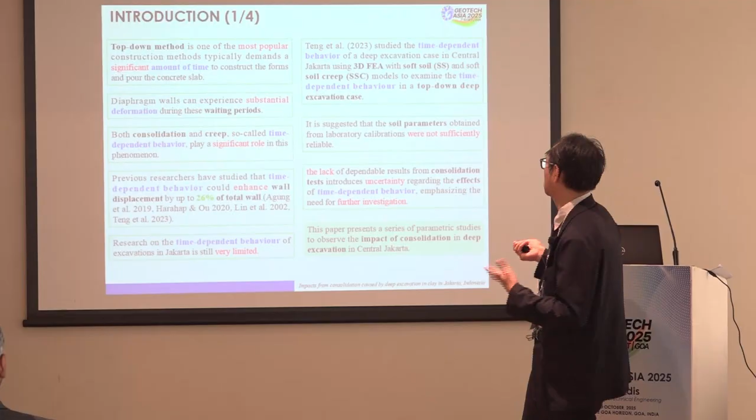And lack of dependable results from the consolidation test introduced major uncertainty, because we don't have reliable SI data, so there are uncertainties for the time-dependent effect. That's the background for why we want to do this study and try to get some conclusions.

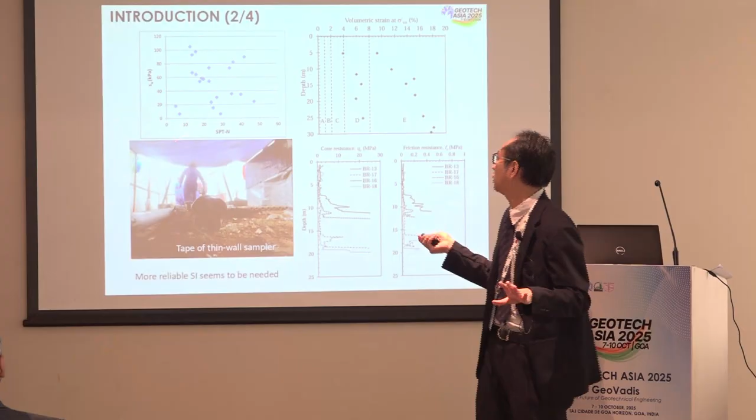Now talking about the uncertainty of the soils which we have here. This is a figure we have, because we use the underground work in Jakarta MRT excavation as a background. As you can see, these axes show the undrained strength, and these axes show the SPT-N value. You can see the data is quite scattered there.

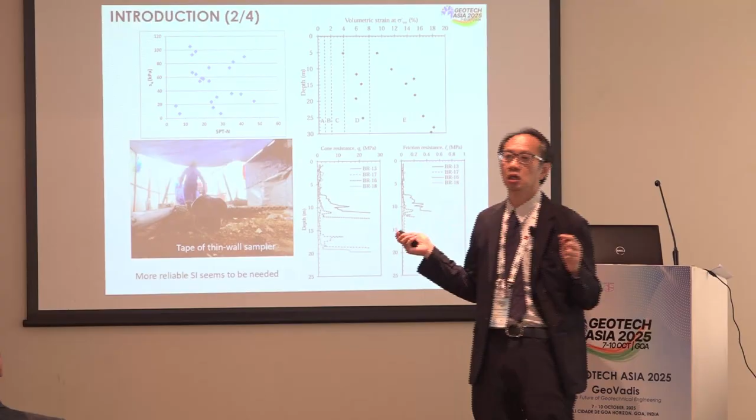So we even cannot find a kind of relationship between the Su and the SPT-N value. We tried to explore why, because supposedly, if you understand from the statement made by Professor Skempton, it should have one. So we look at the data we have, the so-called SQD, sample quality designation, recommended by Professor Tanaka and Professor Park, to evaluate sample quality.

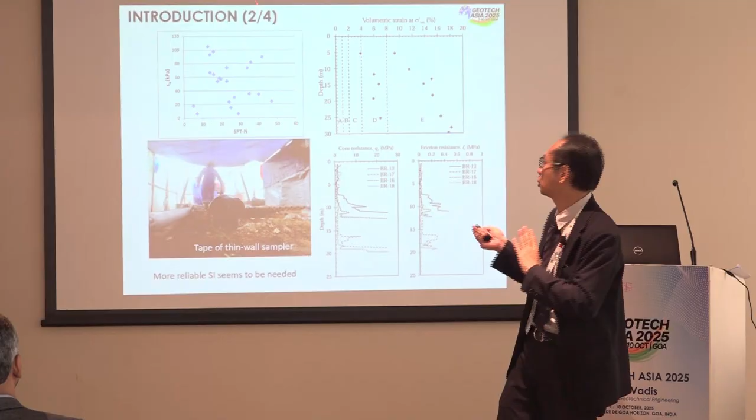In fact, by the volumetric strain which you have from the sample, you understand most of the samples we have are in level C, D, E. But actually, Professor Tanaka and Park say if you want to have an undisturbed sample, you need to keep the level in A and B. So that's one of the reasons why I say maybe our test data is not that reliable.

And again, if you look at this sampler, a thin wall sampler, the tip here should be rounded, but as you can see, that's totally twisted. And they used that to do the sampling work. So from these two, we understand our samples are kind of disturbed.

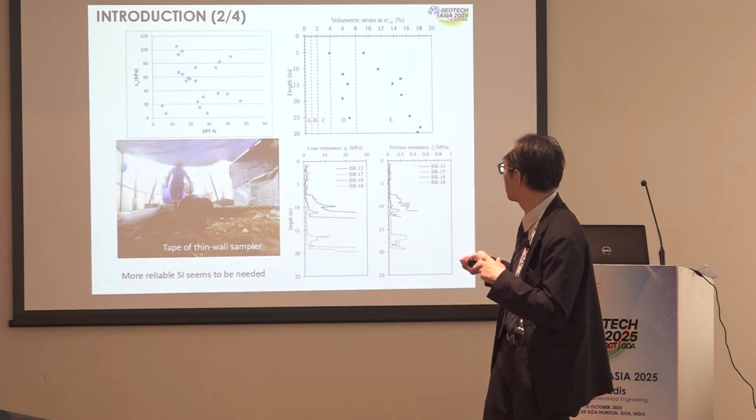So we also look at the CPT results and understand that deeper than maybe 8 meters below surface ground level, the soil is actually quite stiff. This gives us a kind of confidence that we have to do more tests together with CPT to get more reliable test data.

That's what the site condition is. And a very special thing is, even though that's in Jakarta, funded by the Japanese government, we, as a company of engineers from Taiwan, had a chance to be involved in this project. That's the reason why when we had the first tunnel breakthrough, we had our national flag there.

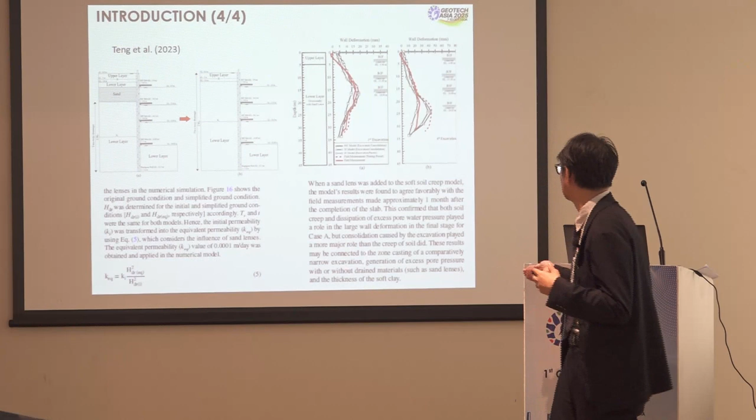Okay, here comes the last page of my introduction. So that's some conclusions we got here, because we do find some sand layers between very thick clay. That's the reason why we needed to evaluate how consolidation and even creep affect the deformations. And in fact, we understand from the simulation that consolidation is quite an important factor for deep excavation in Jakarta using the top-down method.

But as I just mentioned, we do have some uncertainties about the time-dependent soil parameters, like the compression index, or the swelling index, or the creep index, and even the construction time of the slab. So we want to explore those parameters individually, one by one.

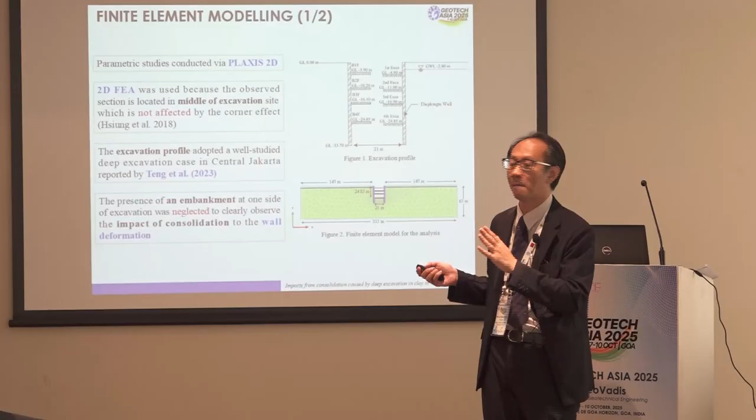So here, talking about the FE models we have. We use Plaxis software and do the two-dimensional analysis, and that's the case. That's a profile, the excavation profile together with the soil we have here, and as you can see, that's excavation down to like 24 something below surface level, but the wall is actually not that deep.

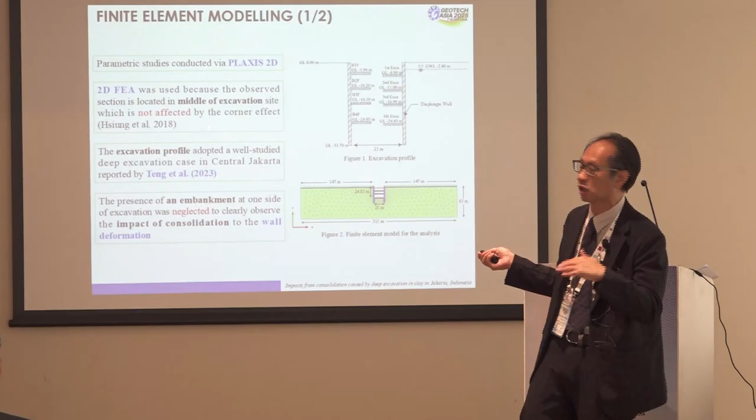It's up to 33 meters, because as I just mentioned, going down further to 8 meters below surface level, the soil is quite stiff. And we use the same excavation profile as in 2023, so that's the reason why I say this is a follow-up study.

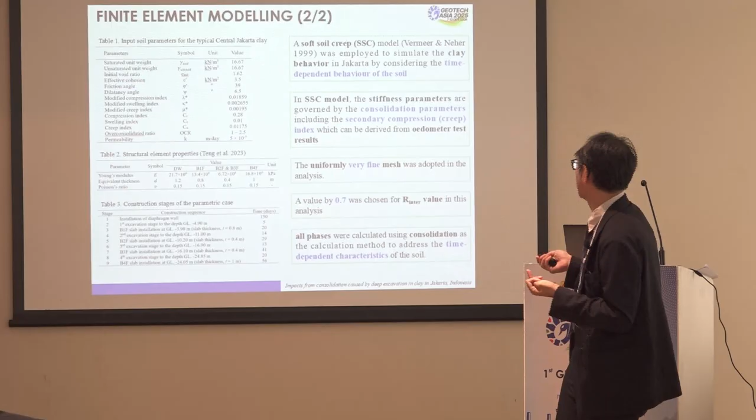Very quickly, let me further explain the FE models which we have. We again use soft soil creep models. Here lists all the parameters used. The consolidation parameters we include are the compression index, the swelling index, and the creep index. We use a uniform, very fine mesh in our analysis, and a value of 0.7 for the R-inter. This is the construction phase assumed in our analysis, and these are the structural parameters used for the retaining wall and also for the RC slab in our model.

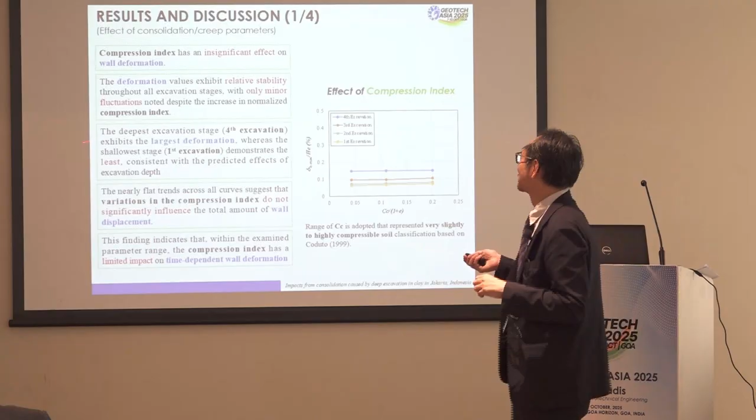Now we want to explore the parameters one by one. Sorry, how much time do I have now? Another 5 minutes, okay, so I have to be quick.

So the first one we evaluate is the so-called compression index. If you look at the result here, this is a ratio showing the maximum wall deflection divided by H, and here we change the compression index. As you can see, the line is quite straight, quite flat, meaning that changing the compression index may not give a very significant change in wall deformations. So even though we don't have confidence about the compression index, it should be fine because it doesn't change a lot. That's the first conclusion from the compression index.

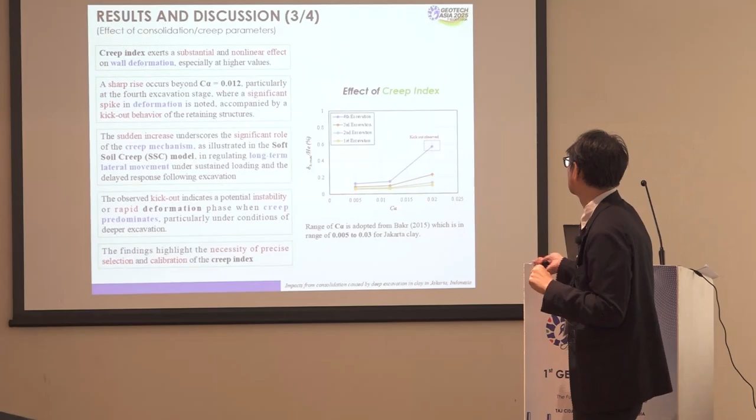The last one is about the creep index. Again, we put it in the figures here, the same ratio, the maximum wall displacement divided by the excavation, against the creep index. If you have a creep index less than 0.012, there's no significant change. But once you have a value more than that, it will affect more. So for this index, I think we will need more exploration, to confirm what the value will be, by laboratory testing to understand what the creep index will be.

And the last one is the construction time. Our understanding is that if the construction time is longer, you are going to have more displacement rather than the original one. So construction time really is an issue.

So here I come to the conclusion. Very quickly, as I said, the compression index doesn't significantly affect the result, but the swelling index does affect a lot. So you really will have to consider the real swelling index to get a more reliable one. And the creep index, as I mentioned, as long as you have a value more than 0.012, it is going to affect more. So more reliable testing about the creep has to be done, and also the construction time is also an issue affecting the maximum wall displacement. Okay, that's the end of my presentation. Thank you very much.

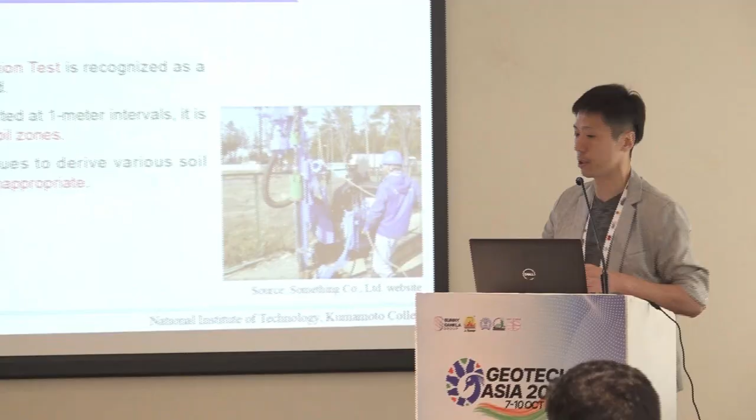In Japan, the standard penetration test is recognized as the representative investigation method. However, since the test is conducted at 1 meter intervals, it is difficult to identify localized weak soil zones. Furthermore, relying on N values to derive various soil properties for structural design is inappropriate.

So this study aimed to identify the bearing stratum prior to bridge foundation construction using N-values, X-ray CT analysis of boring cores, and density log. X-ray CT analysis was used to estimate core density, and the accuracy of the density values was assessed with density log results. Based on density, we attempt to evaluate the bearing stratum, and the results are reported here.

Next, survey site and survey method. This study area includes a river bridge located within Kumamoto Prefecture, Japan, and the stratigraphic composition is shown in this table. The fourth layer is the bearing stratum, consisting of a sandy gravel layer with cobbles, showing N values greater than 50. However, in the upper part, a slightly loose gravel layer is distributed. Therefore, careful attention is required to accurately identify the bearing strata.

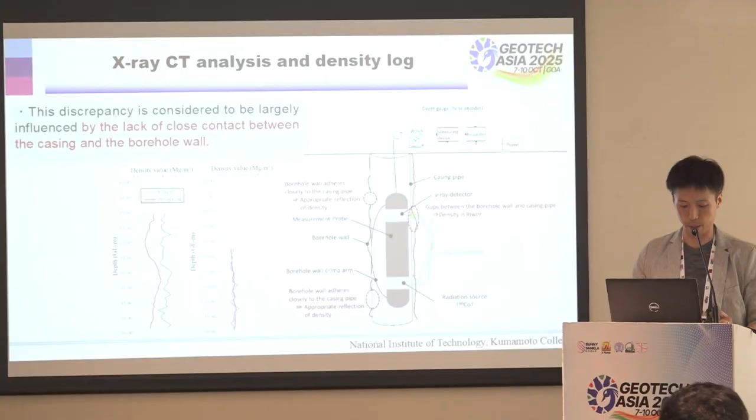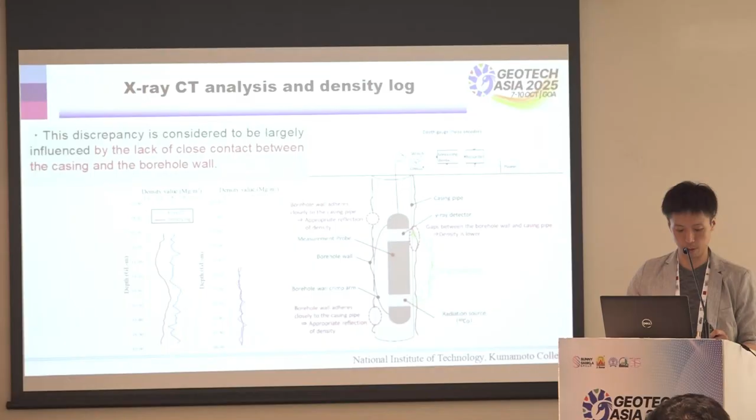We have confirmed from observation of the borehole core that it is a clay layer, so of course no gravel. It is considered that there was little to no gap between the casing pipe and the borehole wall. As a result, the correlation with density exhibits a clear trend. This can also be considered supporting data for the hypothesis that the density discrepancy is due to a lack of close contact between the casing perimeter and the borehole.

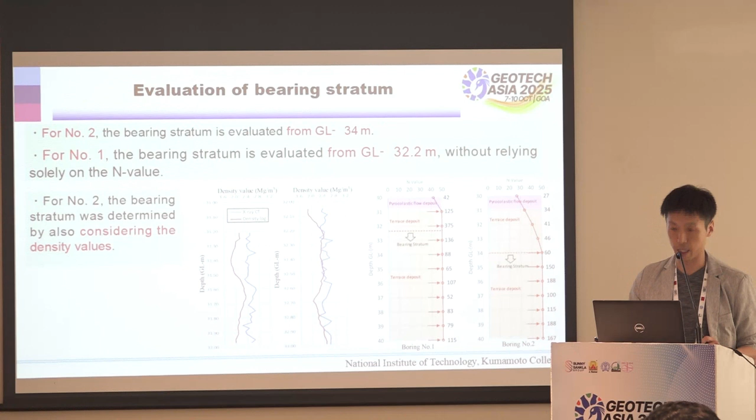Next, this figure shows N values at two representative locations and the evaluation of the bearing stratum. For number 2, since the N value remains below 50 even within the terrace deposit layer, the bearing stratum is evaluated from 34 meters. For number 1, the N value reaches 50 immediately upon entering the terrace deposit layer, indicating that based solely on the N value, the upper part of the terrace deposit layer can be considered suitable as the bearing stratum.

However, number 1 corresponds to the location where the density values were previously shown, and the upper part above the measured density may consist of small gravel or looser matrix. Therefore, since the upper part may be loose due to redeposition, the bearing stratum is evaluated at depths near 32.2 meters, where the discrepancy between the two density values becomes very minimal.

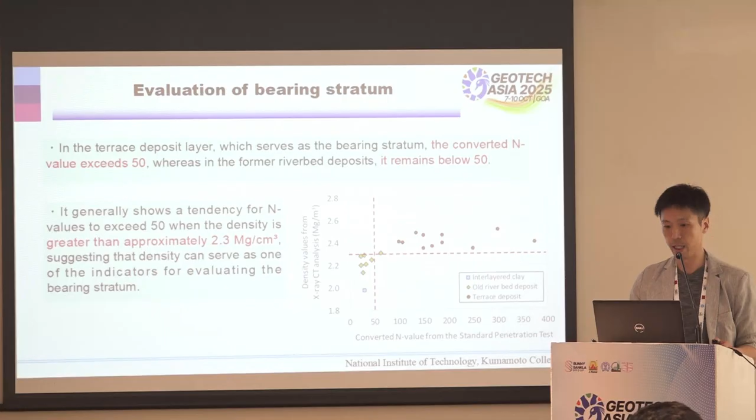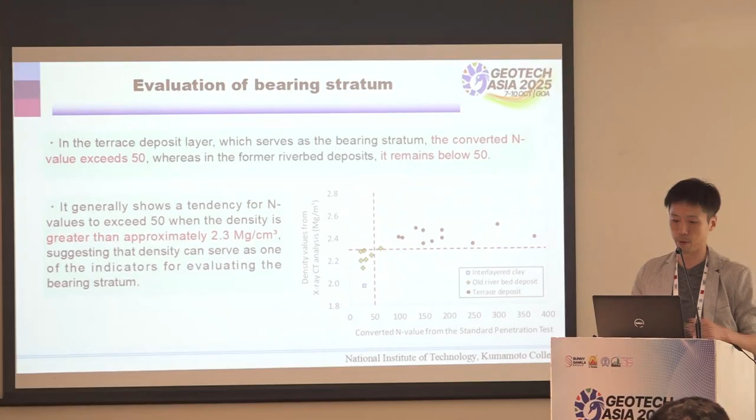Next, I will discuss the correlation between the density values obtained from X-ray CT analysis and the converted N values. In the terrace deposit layer, which serves as the bearing stratum, the converted N value exceeds 50, whereas in the former riverbed deposits it remains below 50. It generally shows a tendency for N values to exceed 50 when the density is greater than approximately 2.3, suggesting that density can serve as one of the indicators for evaluating the bearing stratum.

In conclusion, we conducted the bearing stratum evaluation not only based on N value, but also using X-ray CT analysis and density log, with the aim of more reliably identifying the bearing stratum. As a result, these conclusions were obtained.

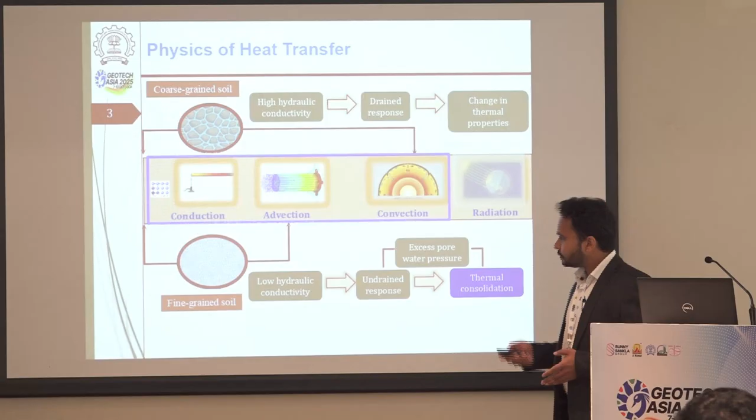This whole process has 3 major components when it comes to geotechnical engineering: thermal, hydraulic, and mechanical. When we talk about deep foundations where temperature is involved, we have to investigate this THM, famously called thermo-hydromechanical coupling, that influences pile capacity and soil-pile interaction on the surface. But for this presentation, I will mostly focus on the thermo-hydro coupling, how temperature and the hydraulic component are going to influence the process.

If we talk a little bit about the mathematics here, we see the standard heat transfer equation in a porous media, where we have a heat storage component, a fluid flow component, and how heat transfer happens because of thermal conductivity. And this is a Brinkman equation. I am not going into detail of this equation, but how these 2 equations are coupled to affect both thermal and hydraulic processes.

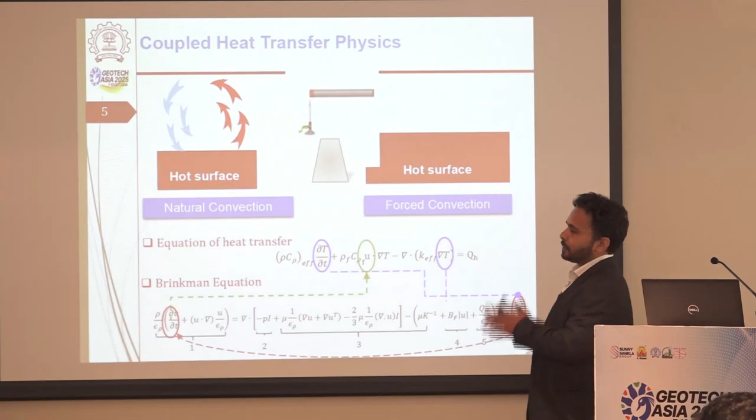If we look here, there is a time dependent change in temperature, dT over dt. And because we have a thermal gradient here, the density of the pore fluid changes in the medium. That density driven flow creates a volume force in the fluid, and that triggers a velocity. Once this velocity is triggered, it will activate this component. So by two-way coupling, heat transfer and fluid flow both influence each other, and this process becomes a highly non-linear process.

In terms of energy piles, why energy pile? Because anyway, to sustain a building structure, we are installing piles. We can install a geothermal heat exchanger in the pile and utilize this process without any additional cost of a borehole or any other medium.

When we install a geothermal pile, the geothermal heat exchangers can be of many shapes and sizes depending on the pile diameter and need. It can be a single U-loop, it can be a double U-loop, it can be multiple U-loops depending on the diameter of the pile. If it is a very big diameter like 1 meter or 2 meters, we can have 3 or 4 loops. Depending on the design, it can be coaxial as well, where you send the fluid from the center and take it from the top.

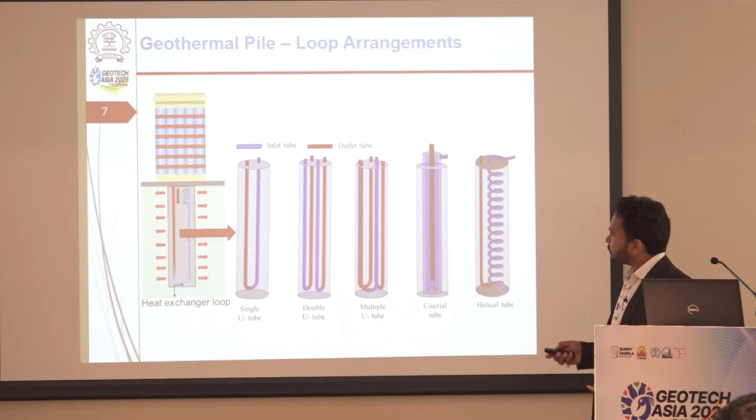For this study, we took an example of 3 piles in a group at different spacing, with a clay layer and a sand layer, the sand layer having high hydraulic conductivity. We looked at how the natural convection process affects the entire heat transfer process in this medium, using finite element software for this design.

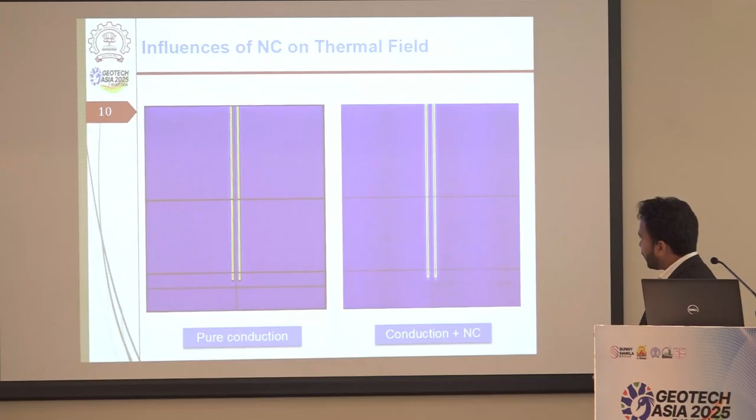In the sand layer, heat transfer happens much faster compared to the clay layer. Initially, when natural convection is not triggered, the process is almost the same in both layers, but as time progresses, the sand layer shows very high thermal expansion.

When we look at the thermal temperature contour considering only conduction, without coupling the thermomechanical and thermohydro processes (TH process), temperature is evenly distributed in both layers because we are not considering the hydraulic component.

But when we consider the hydraulic component, in the sand layer temperature is distributed very narrowly, because most of the heat is getting dissipated far away due to natural convection. In case of conduction alone, all the temperatures stay close to the pile.

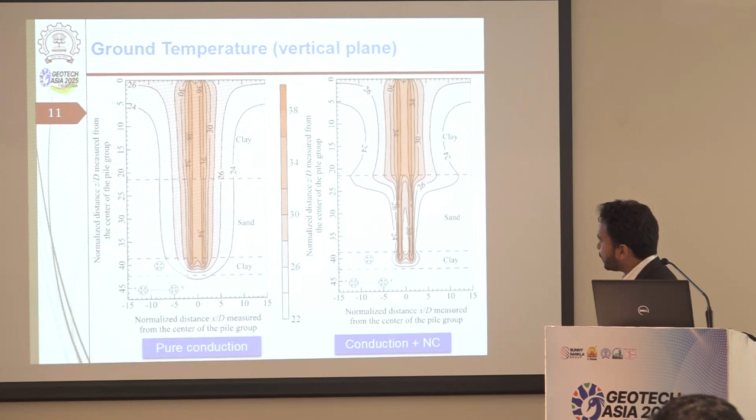We have 2 minutes, Arvind. Okay. When we investigated the heat storage capacity, we found that the coupled flow process is always able to store more energy, depending on the pile spacing.

This shows that when we model with the proper physics happening in the ground, we can extract more and more energy.

So we conclude that natural convection does influence the heat transfer process, affecting our energy extraction and injection capacity. When designing a geothermal pile, we should not design based on conduction alone, because then we assume the entire pile increases with the same temperature.

But we saw that in practice it's not happening that way. When we have a layer of coarse-grained soil with higher hydraulic conductivity, the temperature increase is less, and this temperature difference between sections of the pile will influence the pile's integrity and bearing capacity.

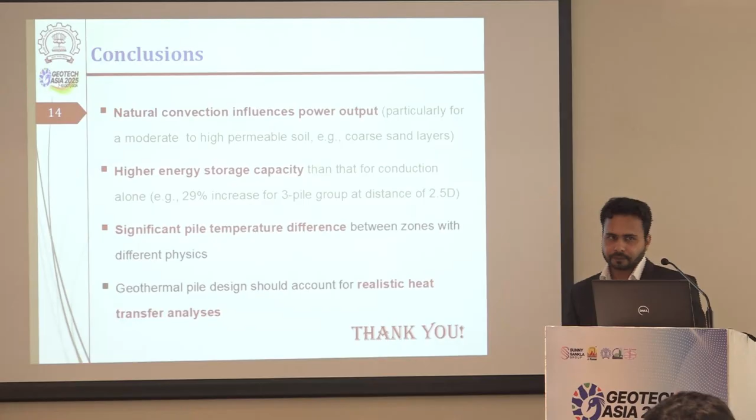What are the temperatures you are talking about here? We consider the ground temperature as 22 degrees, and the inlet temperature was 40 degrees.

It was mostly simulating the Indian condition, where we have a hot summer and we want to cool the building. We take the inlet as the high temperature from the building, and since the ground is at a lower temperature of 22 degrees, the heat we get is lower than 40, and we utilize this to cool the building. In winter it will be exactly opposite.

This is basically a numerical study, or do you have field data as well? This is the numerical study, but now where I am doing my postdoc, we are doing it in the field as well.

Thank you very much. Are we doing this in real life projects, these things, in India? Yes, we are doing it in real life. I believe we always talk with professors about why we are not doing it in India. We are doing it in Europe, China, Australia, USA, almost everywhere except India.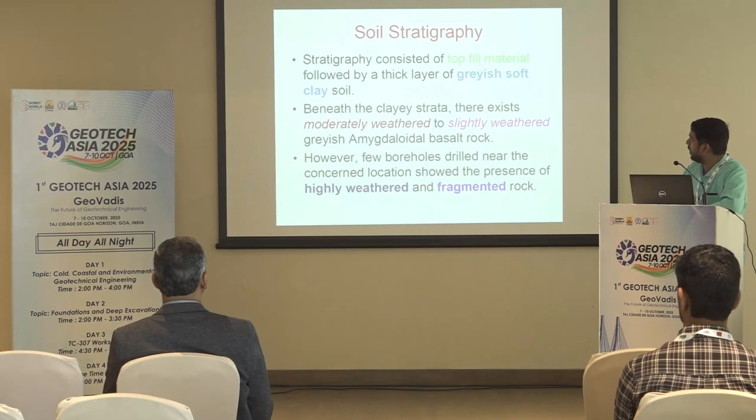It was followed by a thick layer of greyish soft clay soil. Beneath the clay strata, there existed moderately weathered to slightly weathered amygdaloidal basalt rock. However, few boreholes drilled near the concerned location showed the presence of highly weathered and fragmented rock as well.

Coming to the foundation details, the proposed foundation actually consisted of a pile group connected to a raft, which acted as the base for the slurry storage tank. Each tank was supported by a group of 97 piles in circular pattern, and diameter of these piles was 0.6 meter with a center-to-center radial spacing that varied from 1.5 to 2 meters.

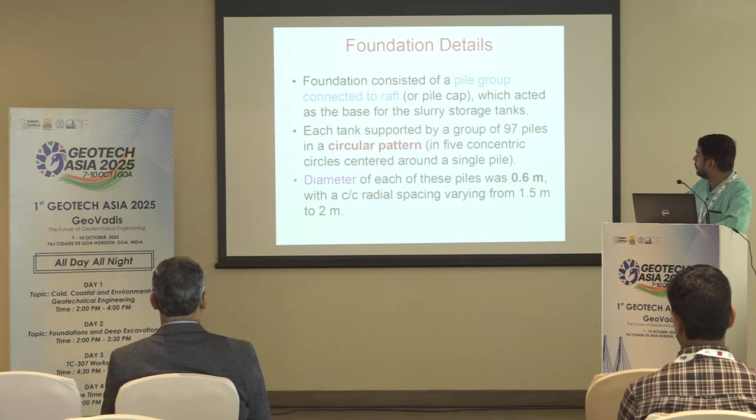So this was the arrangement of piles, the 97 piles in concentric circular pattern, and minimum spacing was around 2.5 D. The embedment length of the piles varied from 21.2 meters to 25.2 meters depending upon the availability of competent rock strata, and all the piles were socketed to a depth of about 1.2 meter, that's about 2 times the pile diameter of 0.6 meter.

Coming to the numerical investigation that was done to perform this forensic analysis, it was done in Plaxis 3D, latest version. The soil stratigraphy was divided into 3 layers: top fill material from 0 to 1.5 meter, soft clay soil from 1.5 to 22 meter, and medium gray basalt rock extended to 30 meters.

The constitutive model for the fill and rock layer was Mohr-Coulomb model, and soft soil model was used to represent the behavior of the sandwiched clay layer, which was exhibiting a high degree of compressibility. In fact, the compression index was around 2.37, and pile group was modeled using an array of elastic embedded beams. Maximum value of the skin friction resistance and base resistance has been entered as a part of embedded beam property.

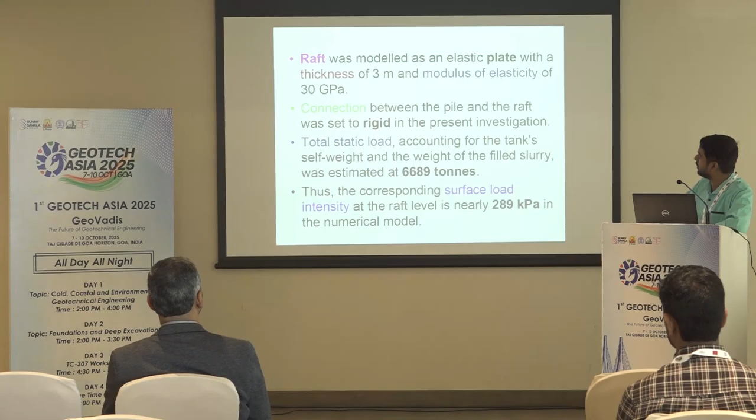Now the raft was modeled as an elastic plate with a thickness of 3 meter and modulus of elasticity of 30 gigapascal, which is a value for the concrete. Connection between the pile and the raft was set to rigid in the present investigation.

Now coming to the results and discussion, if you see the effect of rock quality condition, the average of RQD and core recovery was around 70%. Now if we calculate the ultimate bearing capacity of this rock socketed pile based on IRC 78/2014, it will come around 4,483 kilonewton.

However, in few boreholes located closer to the tank area, the rock quality designation and the core recovery values are very low. In fact, RQD plus core recovery divided by 2 will come less than 30%.

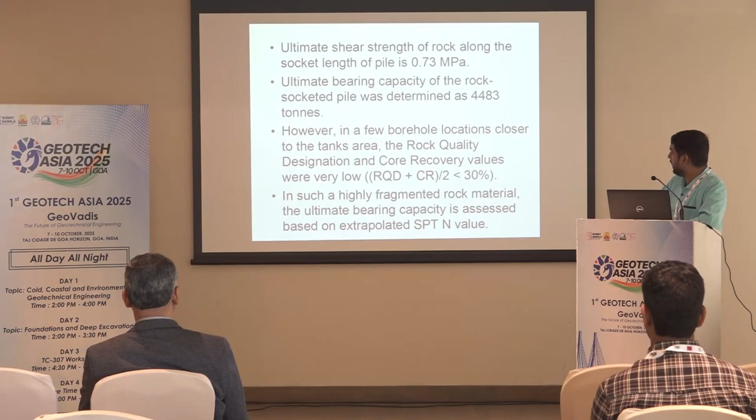Now coming to the effect of downward drag forces. For this, the numerical analysis was conducted with a consolidation calculation, where the soft layer was allowed to consolidate for a period of 365 days. Axial force at the pile tip was found to increase from 780 kilonewton to 996 kilonewton, and this would affect the factor of safety.

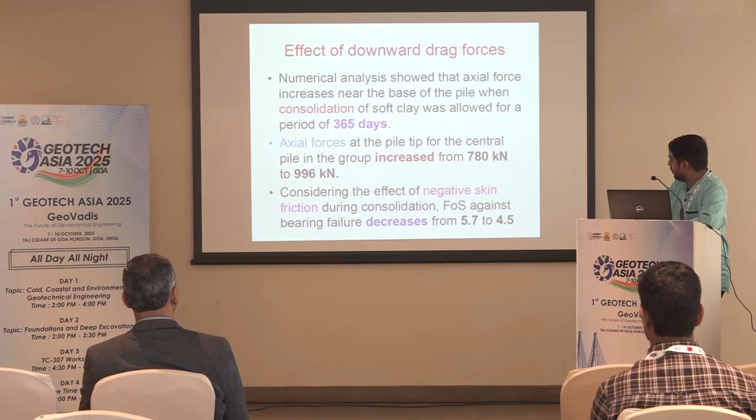The factor of safety would go down now from 5.7 to 4.5 in case there is a good quality rock. But in case the rock quality was much lesser, as RQD and core recovery by 2 is less than 30, as was the case in some boreholes, it would come as low as 1.9, considering the combined effect of downward drag and the existence of very poor rock condition.

Although the failure risk may be substantiated with a highly reduced factor of safety, it does not explain the cause of failure, because still the factor of safety is greater than 1, and the settlements were around 50 to 60 mm only. Now, another possibility could be that the pile is terminated on soft clay.

High magnitude of total and differential settlement may not occur even if the pile was terminated in very weak fragmented rock zone. In this scenario, it is suspected that the pile was terminated in a much softer material with comparatively lower stiffness and strength. Distinction between the rock and the soil at the site was just based on specific gravity. In fact, something greater than 2.7 was classified as rock. However, specific gravity is not a proper indicator of the strength.

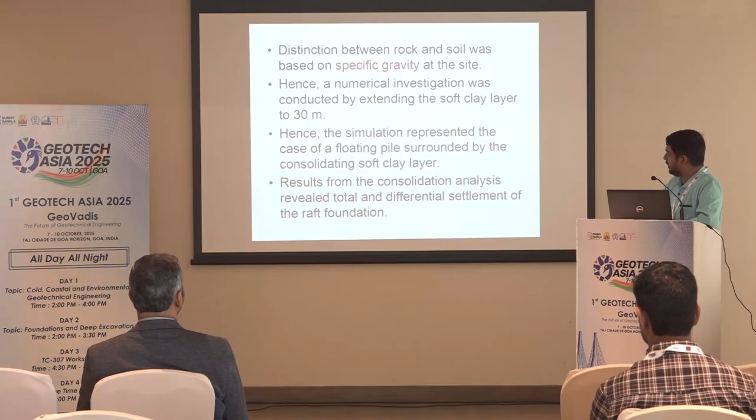Hence, a numerical investigation was conducted by extending the soft clay layer to 30 meters. The simulation represented the case of a floating pile surrounded by a consolidating soft clay layer. Results from the consolidation analysis revealed the total and differential settlement of the pile raft foundation. The maximum and minimum settlement were around 701 mm and 471 mm. This was very close to the maximum settlement observed at the site, which was around 628 mm and 734 mm.

However, the tilt obtained in the present analysis is about 1 in 80. This was much lesser than the reported value of 1 in 20 and 1 in 30. This may be attributed to the very rigid connection that was assumed in the FE model between the pile and the raft. Also, the raft-soil interaction was not modeled accurately in the analysis, so it may be concluded that there is a high probability that most of the piles are founded on soft compressible clay strata.

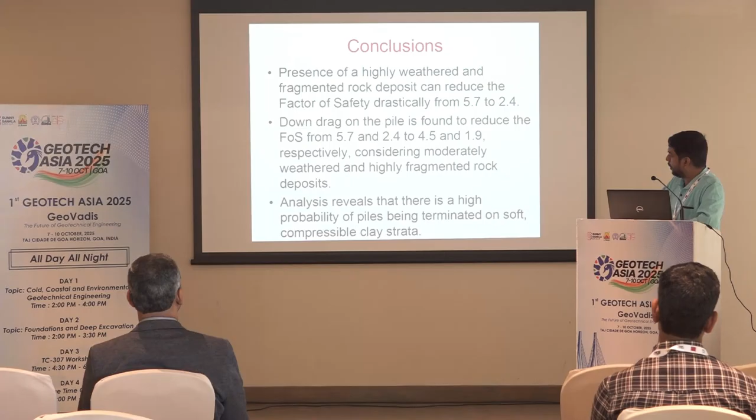Coming to the conclusions: presence of a highly weathered and fragmented rock deposit reduces the factor of safety drastically from 5.7 to 2.4, and the downward drag on the pile is found to reduce factor of safety further from 5.7 and 2.4 to 4.5 and 1.9 respectively, considering the moderately weathered and highly fragmented rock deposits. The analysis also reveals that there is a high probability of piles being terminated on soft compressible clay strata, leading to heavy settlements. That's all from me. Thank you.

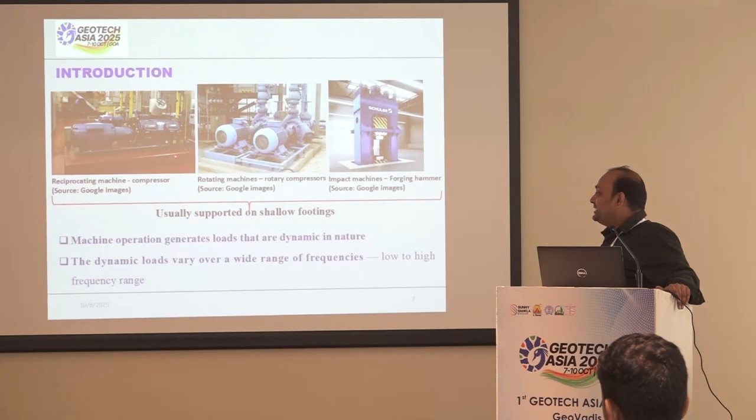So you see that you have a compressor over here, which is basically a reciprocating machine. You have a rotary machine, which is a rotary compressor, and you have an impact machine, which is a forging hammer. So all these kinds of machines need a footing or a foundation to rest on, and when these machines operate, they generate dynamic loads. These dynamic loads have a wide range of frequencies, varying from low to high.

So this particular problem that we are going to solve, or that we are going to develop, is basically for these sets of applications.

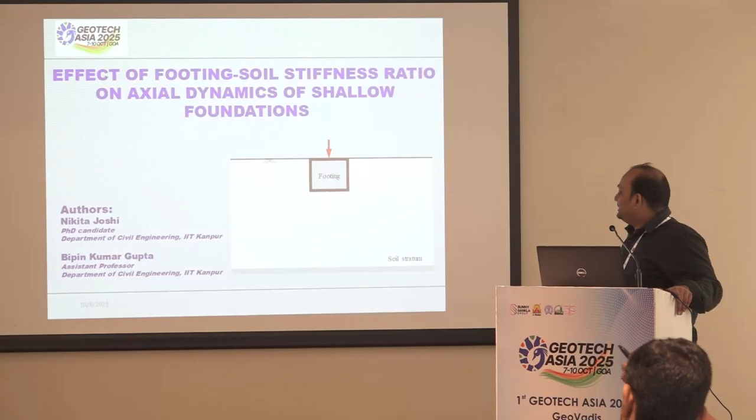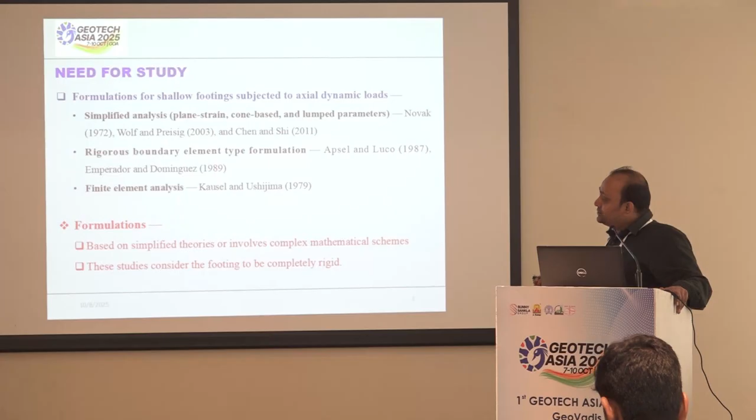So all these formulations that you see, they have certain deficiencies. Some of them are based on simplified theories, not rigorous enough. It does not incorporate three-dimensional effects, and they might be based on complex mathematical schemes. You are pretty much aware of finite element analysis - for boundary element formulations, we end up using software and all.

When we talk about foundations for these kinds of problems, there is another issue that people have not really investigated. These studies consider the footing to be completely rigid and do not incorporate the effect of stiffness of the footing. So we have developed an analysis to investigate whether the stiffness of the footing is actually necessary or not.

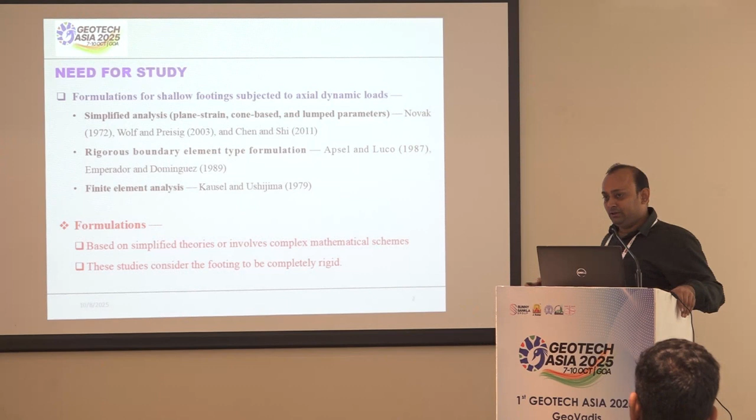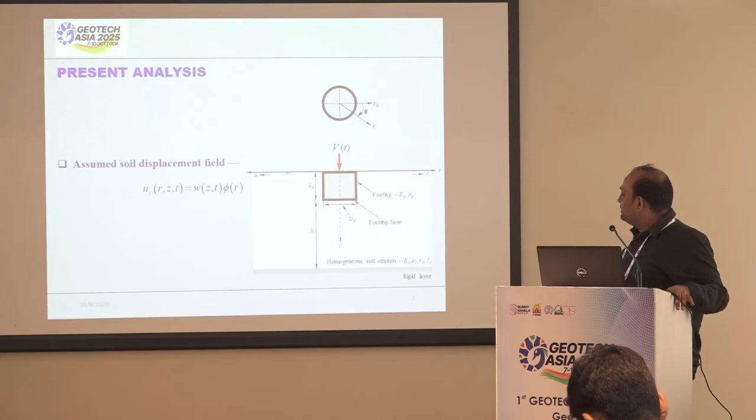So you see I have the same problem, this is my problem statement. I have a footing which has an input of Young's modulus, and because this is a dynamic problem, I also have density. This footing has a radius RP and a length LP, and the distance from the base of the footing to the base of the soil layer is H. The soil is homogeneous, and this is referred to as a soil stratum when soil is resting on a rigid bedrock, with a few properties associated with it.

The first thing we do is apply an axial load and consider an r-theta-z coordinate system to solve the problem. We consider a displacement field for the soil given by a particular equation, where uz, the displacement of the soil, is equal to w multiplied by phi. W is the displacement of the pile or footing in the vertical direction, and phi is the soil displacement function. So we begin with this assumption of the soil displacement field.

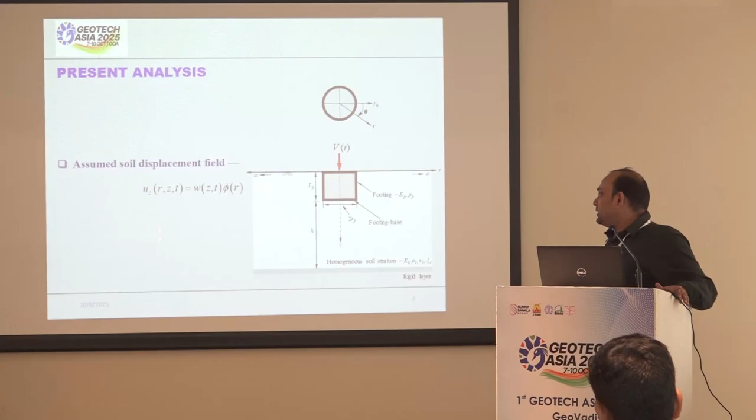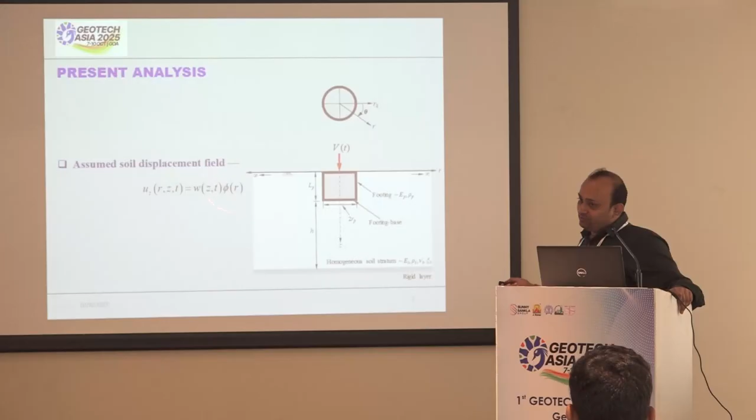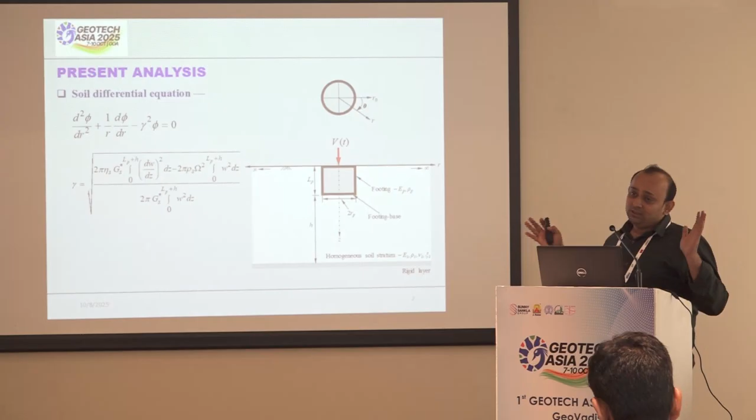Let's go back to the first differential equation. This equation contains a parameter gamma, which describes the rate of decay of soil displacement with increasing radial distance from the footing interface.

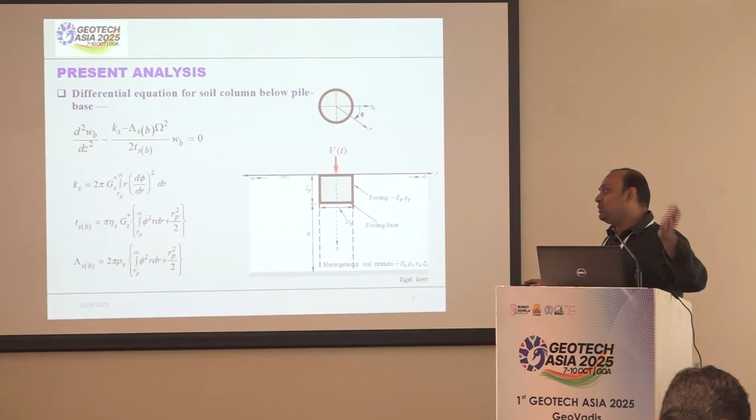There is an analytical solution available, or it can be solved analytically; otherwise we'd have to do numerical solutions, which we usually avoid. There's also a solution for this differential equation for this part of the soil, with parameters Ks, Ts, and lambda s, which are soil parameters. Ks is the compressive resistance, Ts is the shear resistance, and lambda s is the inertial resistance of the soil. Since Ks and Ts are two separate parameters, this is better than plane strain, cone-based models, or other lump parameter models where parameter fitting is required.

Then there is a differential equation for the footing as well, which is also associated with Ks, Ts, and lambda s, but within its own limits.

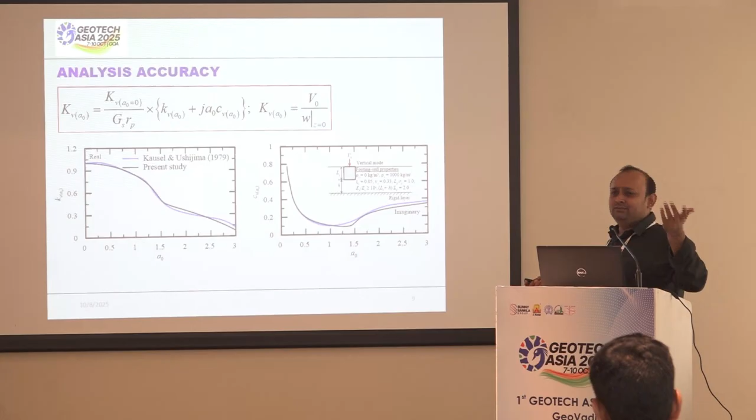We have solved quite a few problems, and there are some range of differences which could be somewhere around 15%. But it's not necessary that this particular method is completely perfect.

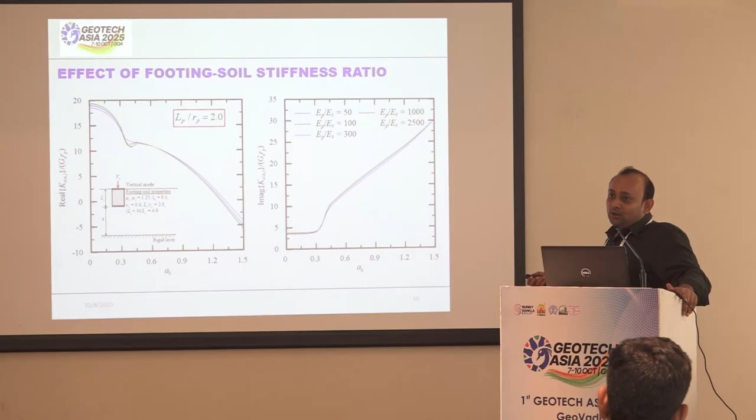Again, when I take an LP by RP of 2, a higher footing slenderness ratio, you see that again I get a certain amount of difference, and the footing soil stiffness ratio does affect the results. So assuming it to be completely rigid might not be valid.

However, depending upon whatever your engineering requirement is, you would want to go for better accuracy, and then you can incorporate the stiffness of the footing as well. So you have some results over here, similar to the previous slide. Another important aspect that gets affected is this particular resonant frequency that you come across when you plot it against the frequency. So all these results are available.

The conclusion that we have drawn is basically we have developed an analytical model, which is very accurate, quite accurate I should say, when I compare it with other finite element analysis as well, or other boundary element analysis. The method produces accurate response for shallow footings.

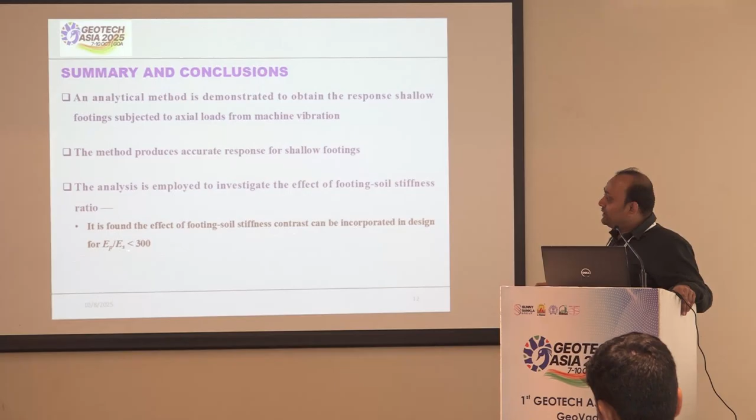The analysis is employed to investigate the effect of footing soil stiffness ratio. It is found the effect of footing soil stiffness contrast, the footing soil stiffness ratio, can be incorporated in design for EP by ES less than 300. So if the ratio of the footing's Young's modulus and the soil Young's modulus is less than 300, then you should incorporate the value of the Young's modulus of the footing as well while doing such an analysis.

This is the conclusion we have drawn from this particular study. In the literature, nothing is done for shallow footings with slenderness ratio from 0.25 to 2. That's why this study was conducted, at least to quantify the amount of difference that you can have. So this was all from this particular presentation.

Thank you. If you have any questions. Thank you. Any questions? Anyone? Thank you, yeah, thanks.

Geothermal piles are mostly installed in new buildings during pre-planning and construction. But what about buildings already constructed 30, 40, 50 years back, where we did not plan enough or think for the future, and did not install geothermal heat exchangers in those piles? If we look at the building scenario in Europe, mostly where I work in Norway, more than 40% of buildings on average are 60 years or more. And if we consider the whole building stock, more than 90% of buildings are more than 30 years old, and these geothermal heat exchangers were not installed in those buildings.

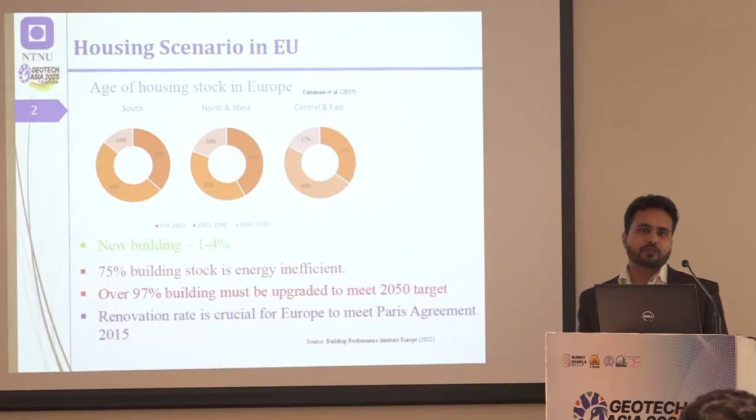So how do we do retrofitting for those buildings, as we say, energy retrofitting? To meet the Paris climate target by 2050, over 97% of European buildings have to be energy retrofitted, because in Europe approximately 40% of energy consumption is in buildings, requiring a lot of heating and cooling demand. About 50% of gas consumption in Europe goes to heating buildings, producing a lot of carbon dioxide. That's why in Europe we are trying to energy retrofit our existing buildings, since that will be the only possible way to cut the CO2 footprint in buildings.

To meet the Paris target, we have to retrofit at least 60% of the building sector by 2030. I assume that deadline is going to be missed, that will not be possible, so we have to target either 2035 or 2040 instead.

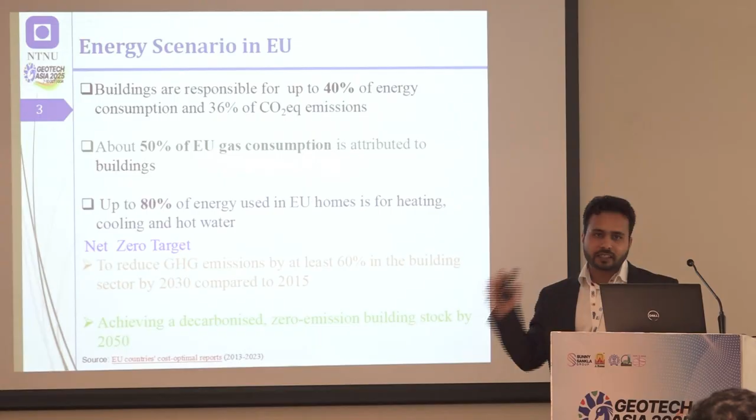What we can do is install micropiles. Micropiles are not new; they have been used since the Second World War to underpin buildings and provide additional support post-construction when we see high deformation.

Why do we use energy micropiles? Because the machine is very small and can go into the basement to install the pile. It creates very little vibration and a very small diameter pile. For new buildings it can go up to 300 mm, but for existing buildings it's mostly in the range of 100 mm to 150 mm, and it can easily go into the basement to install the micropile. Depending on the design, the length can vary from 5 meters to even 50 meters in some buildings, though that is very rare.

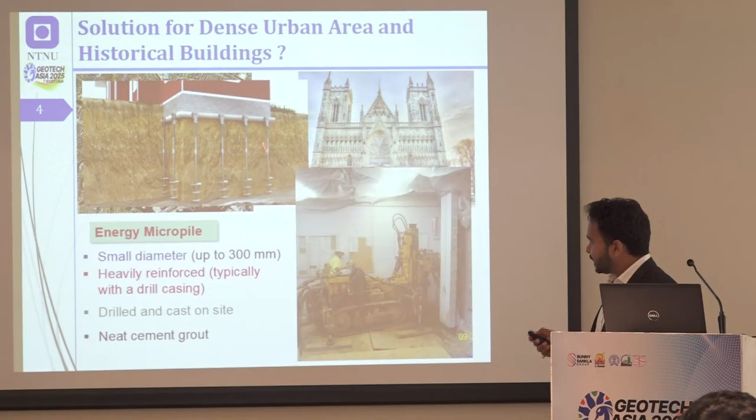We utilize the opportunity that when doing the strengthening of an existing building, we can install a loop in these energy micropiles itself, so we can further utilize this for the energy, heating and cooling of the building.

If we look at the types of micropiles based on construction method, these are the older versions where we grout the micropile in a borehole, either by gravity grout only, or by putting packers at different spaces and pressurizing these boreholes to create a bigger bulb in the pile. But recently a popular type has emerged called self-drilling.

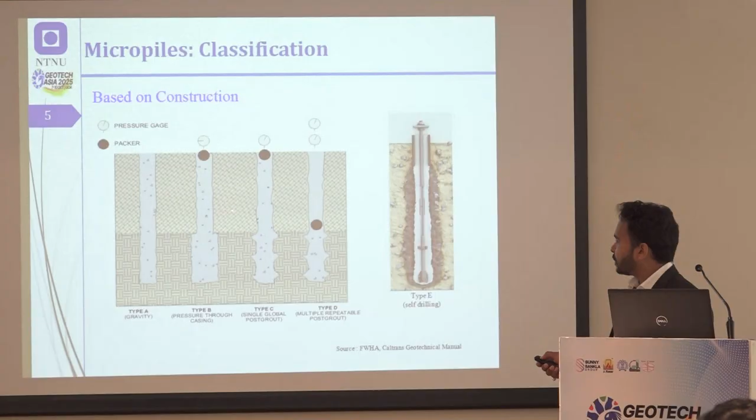With self-drilling, you have a reinforcement bar that is centrally hollow, with a drill bit that rotates, drills the hole, and grouts at the same time. We then leave this central bar as reinforcement. It's a pretty fast process - you can install one micropile in 1 or 2 hours compared to the older methods which take much more time. So this is gaining more and more popularity in Europe.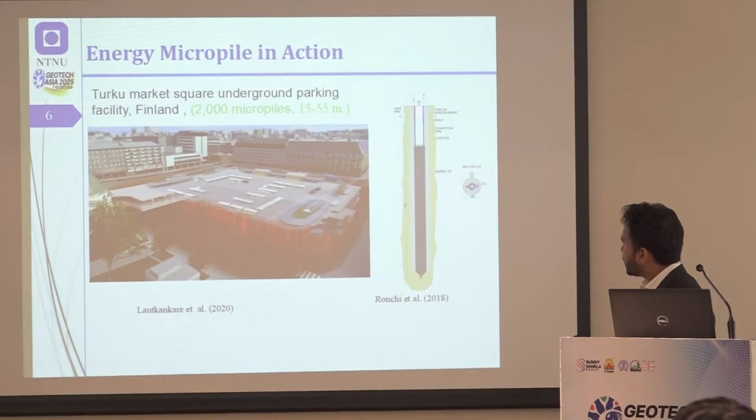One classical example is in Turku, Finland, a parking facility where they installed 2,000 micropiles with lengths varying from 15 to 55 meters. They installed U-loops, as we discussed earlier, in the micropiles, and now use this for de-icing of the surface and for heating and cooling of the adjacent building. It has been working for the last 5 to 7 years.

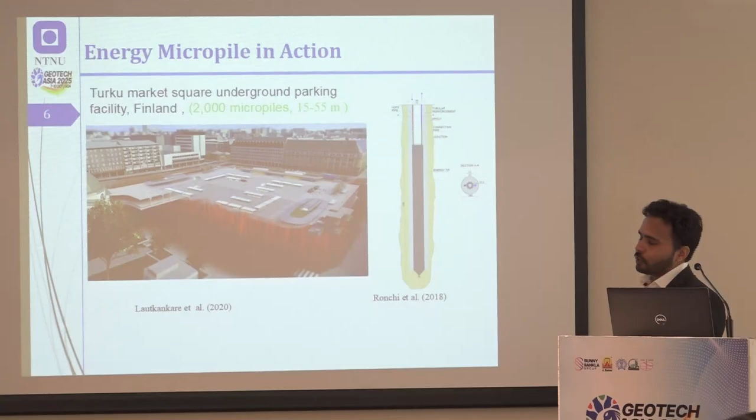It was installed in 2017 or 18, if I'm not wrong. But the only thing to consider is that they had to install these piles with a bigger diameter because they used a U-tube. In most buildings, we have pile diameters quite small where we cannot install the U-loop.

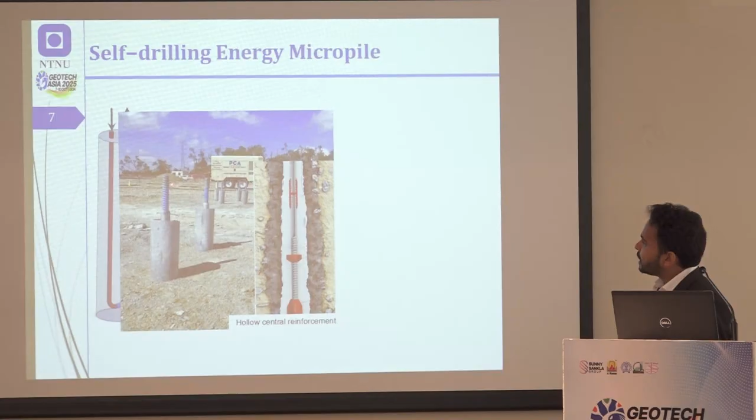So here we are proposing a solution. Generally, if the pile diameter is big, you can usually install a U-loop. But what happens is that most self-drilling piles have a central reinforcement, and this reinforcement is hollow from the center. So we came up with a solution: these Separatus tubes come in the market for boreholes. Why not install this Separatus tube inside the hollow portion, and then we can utilize this pile as an energy micropile. Otherwise, there is no way to utilize these piles as energy micropiles.

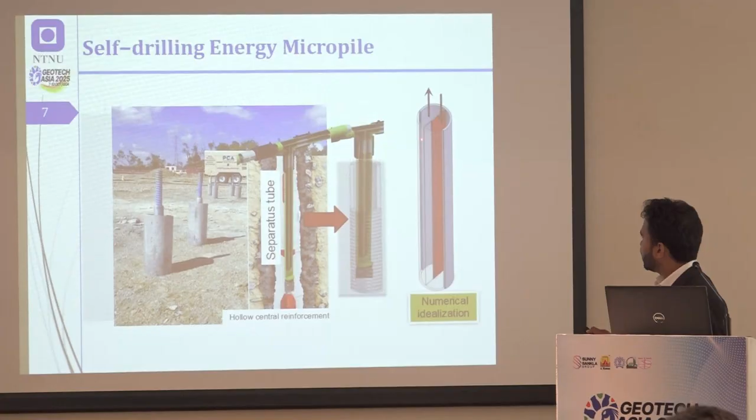So we did some numerical simulation. I made a numerical idealization of this tube as a single tube where half is bifurcated - one half is used as inlet and the other half as outlet. So this is the inlet of the fluid, this is the outlet. We wanted to compare, in terms of thermal performance, how much more or less energy these Separatus tubes give compared to the traditional U-loop.

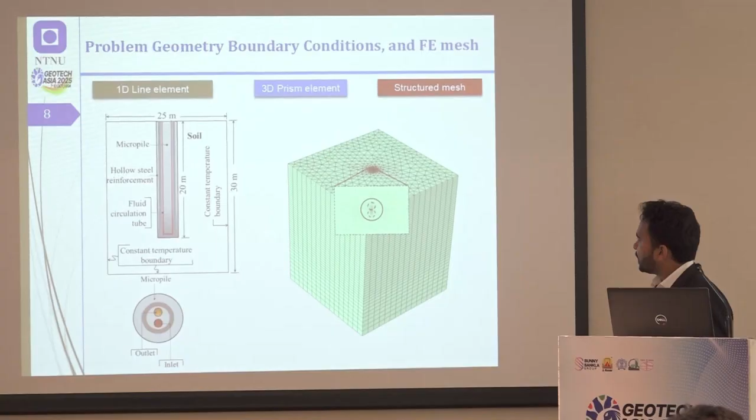We did some numerical simulation and we see that indeed the Separatus tube gives around 15 to 20% lesser energy extraction or energy storage compared to the traditional U-loop. But the benefit is that a lot of micropiles in the upcoming future are not going to be utilized as energy micropiles because we cannot insert the U-loop due to the smaller diameter. But if we install a Separatus tube, then at least we can operate at 80% efficiency, which will be much more useful, because we previously saw that compared to traditional heating and cooling systems, energy piles and geothermal energy are quite useful.

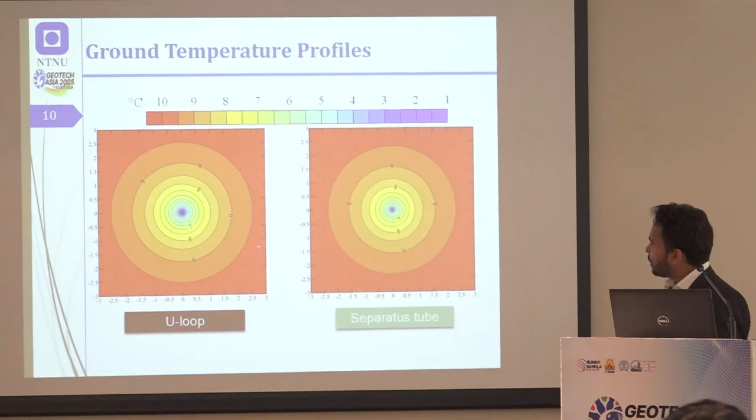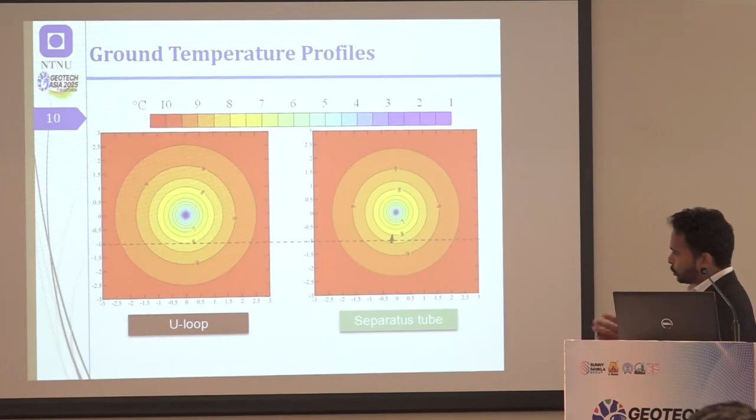Why is this happening? If we look at the previous image, because of these arms - this is known as the shank space between inlet and outlet arms - here it has a wide space, so there is no thermal interaction between these two arms, at least not as much as in the Separatus tube, where the thermal interaction is quite close because the inlet and outlet loops are very close together, stuck together. That's the reason that in the Separatus tube, we have thermal contours very close to each other, and most of the heat is dumping close to the loop. That's the reason it gives less energy.

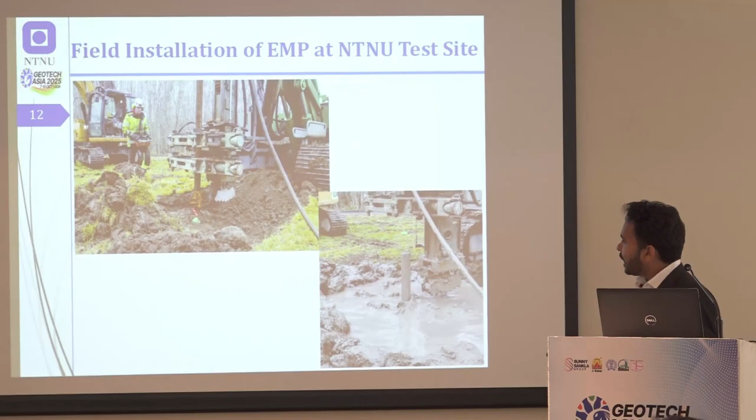So we took this to the field level as well, where we had installed 2 energy piles that we are monitoring in Norway, and then we installed 6 micropiles at these locations. During installation, we see this central reinforcement, a central hollow bar that goes inside, and once we grout that, it looks like that, with a central space here.

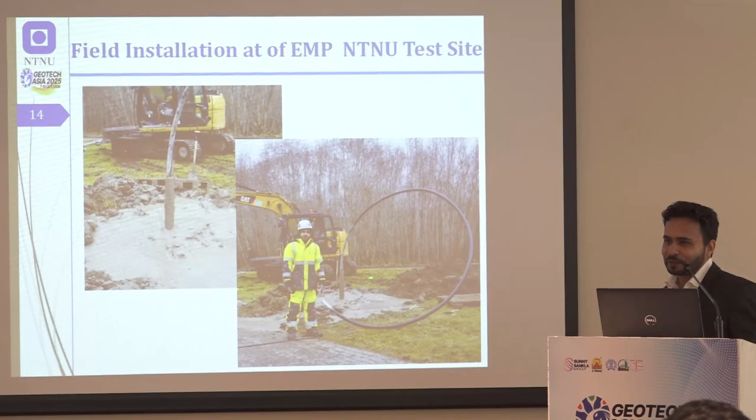Then we insert the loop - the separatus loop - inside the micropile, and once it is done, it looks like this. We were installing last year in November when temperatures dipped to -5, and we were all soaked in water installing these piles.

So right now, before coming to India, I started the operation, so it is going on, and very soon we will get some results out of it.

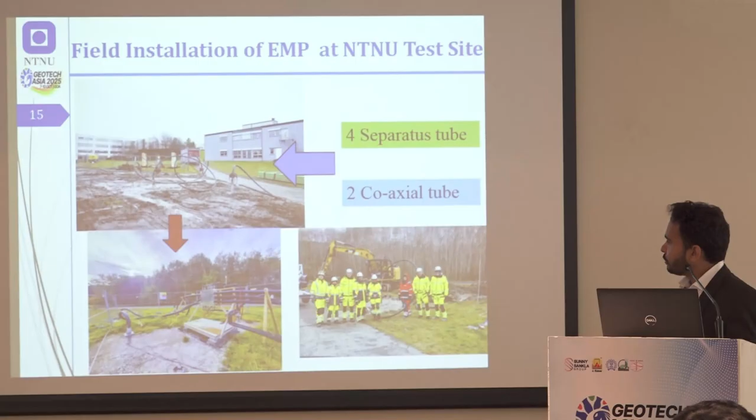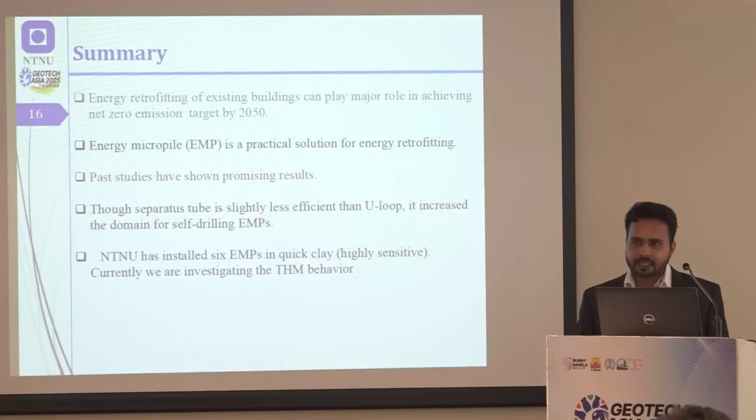Thank you. Any questions? So you said micropiles are mainly meant for existing buildings, right?

Yes sir, mostly, but we can use them for new buildings as well if we don't want to go for very big diameter piles. Mostly in Europe, they use this extensively for underpinning buildings. Suppose after 30-40 years they have a chunk of old buildings that start to settle. Once you see a building settling, they go to the basement and install micropiles to support the building. But for new buildings, as you said, a separatus loop is not energy efficient in storing.

So for the new building, suppose if we go here, let me take you here. This is happening for new buildings as well. There are many places where you don't need very big piles, so people go for micropiles for new buildings too. Now these piles cannot be utilized for energy piles because the diameter is small and you cannot install a traditional U-loop, so you are bound to have separate boreholes.